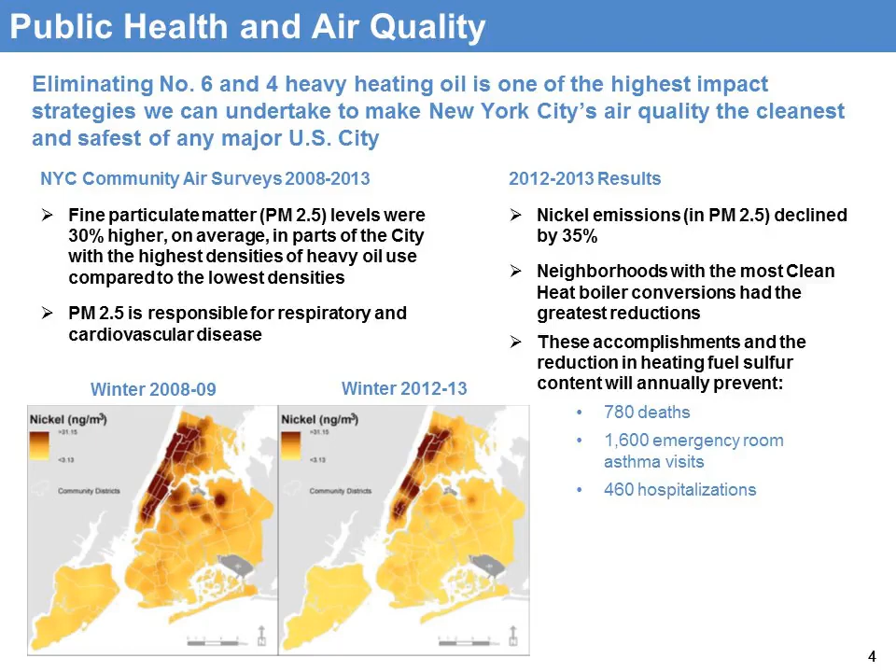In 2011, the DEP finalized regulations to eliminate heavy oil use in two phases. Phase one eliminates number 6 fuel: starting July 2012, the DEP would no longer issue certificates to operate boilers with number 6 oil. Since certificates run for 3 years, all certificates would expire by June 30th, 2015, meaning in just a few months no more number 6 oil would be allowed as a primary heating fuel.

Phase 2 requires all buildings to convert to the cleanest fuels by 2030, or when replacing a boiler or burner. So number 6 and number 4 heavy oils would be eliminated by 2030. However, for example, if a boiler system using number 4 oil needs a burner replacement later this year or next, a conversion to a cleaner fuel would be required then, since another certificate to operate with number 4 would not be issued.

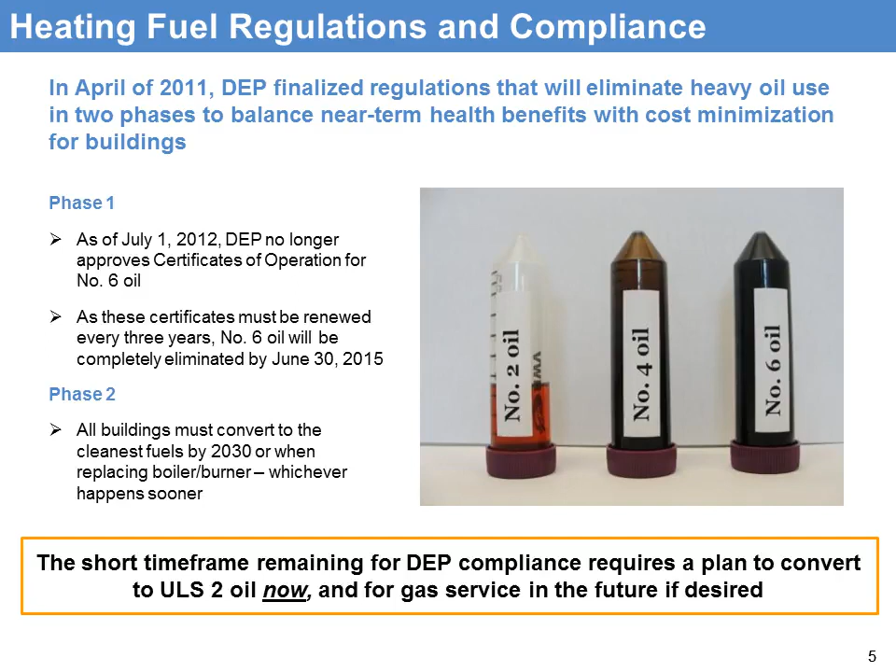All in all, this points to a short time frame remaining for getting into compliance. A plan to convert to ULS2 oil now to get onto a clean fuel is really required, and gas service, if desired, would be something to plan for in the future.

Clean Heat provides technical assistance, working with building owners and property managers to help manage the conversion process to clean fuels. We also have partners for financial assistance to help with the fuel switching process. Visit our website at nyc.gov/cleanheat for more information.

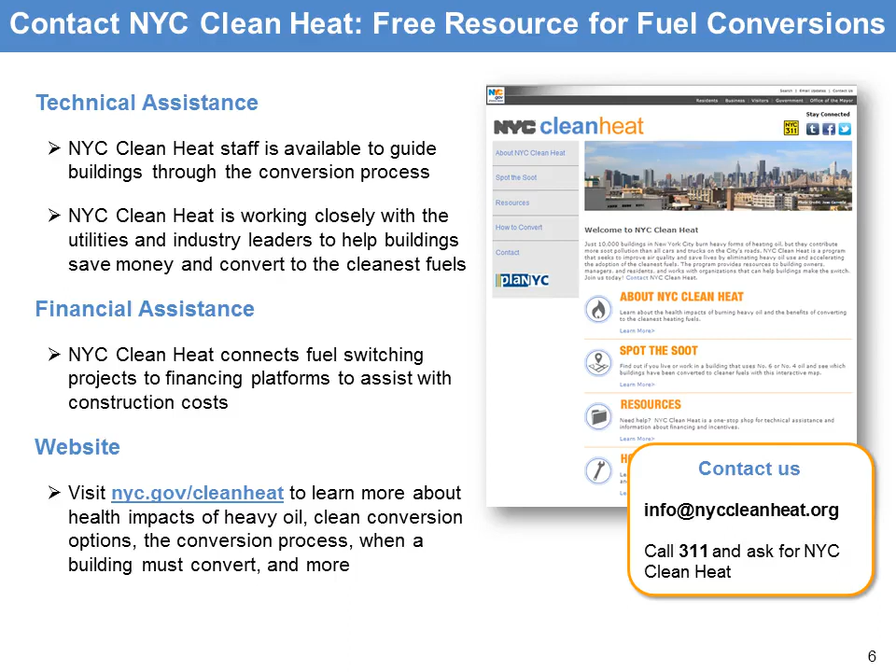We'll now go into the process—really the second of five steps to conversion. The previous webinar talked about assessing fuel choices, and we're now going to look at the process for obtaining contractor bids.

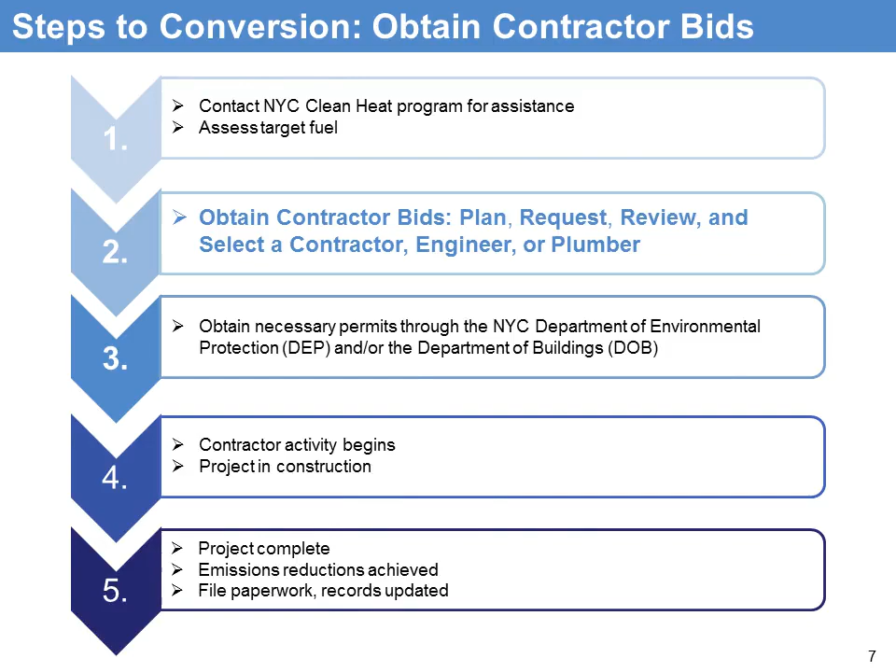The planning stages start by getting a status of the heating system and understanding what's required to move forward: Have the boiler or burner exceeded their useful life? What are the conditions of that equipment? And is the burner capable of burning oil and/or natural gas?

It's also important to assess the condition of the fuel oil storage tank and how it's situated, and for planning for gas in the future, whether the chimney is properly lined or what other repairs may be required.

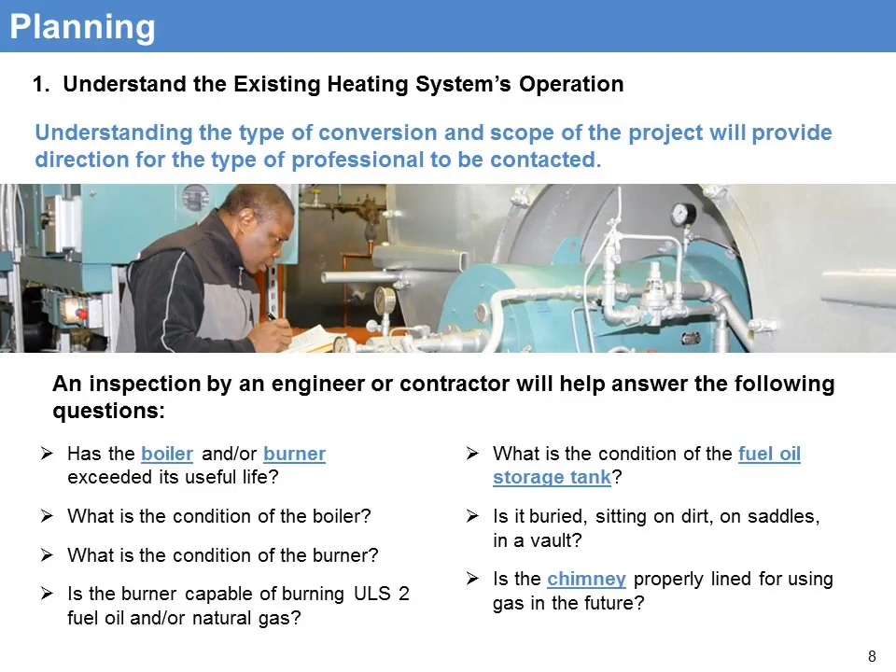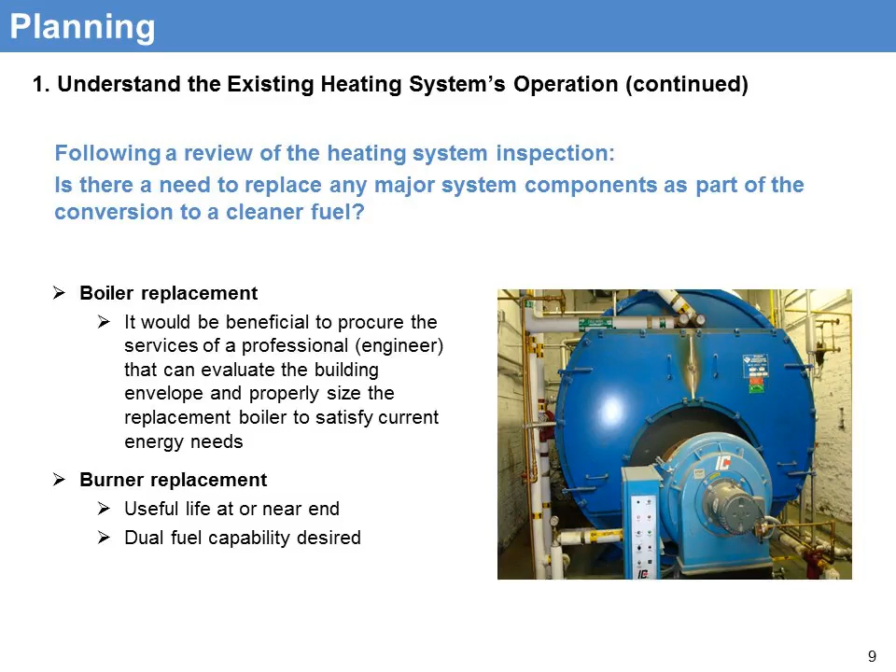In terms of potential replacement, if the boiler is to be replaced, we recommend the services of a professional engineer to evaluate the building envelope and properly size a replacement boiler that meets the property's energy needs. The burner would be replaced if it's at or near the end of its useful life, or if dual fuel capabilities are desired.

As for the fuel oil storage tank, keep in mind it must comply with regulations issued by the New York State Department of Environmental Conservation (DEC). Cleaning and relining the tank may not be cost effective, so it may make sense to replace it at that point.

If you don't have to replace the tank, it's important to bring it and the room up to compliance. Contractors can perform the required work and make sure it's situated properly on saddles, for example, or kept off grade to ensure containment.

We have specialists available who can do this type of work and potentially save money on the job. Once cleaned, the tank must be tested, and if the test fails, there needs to be a plan of remediation to be reported within 2 hours.

It's recommended that you proceed with caution if a contractor claims that tank testing wouldn't be required if you downgrade from number 6 to another heavy oil, like number 4.

Basically, porosity can develop, which could lead to a leak using less viscous fuels, or the small cracks that have been filled by the heavier oil, number 6, may allow for leakage of a thinner mix of fuel, of oil, and money that you'd invest in testing can be far less than the potential costs of cleanups and fines.

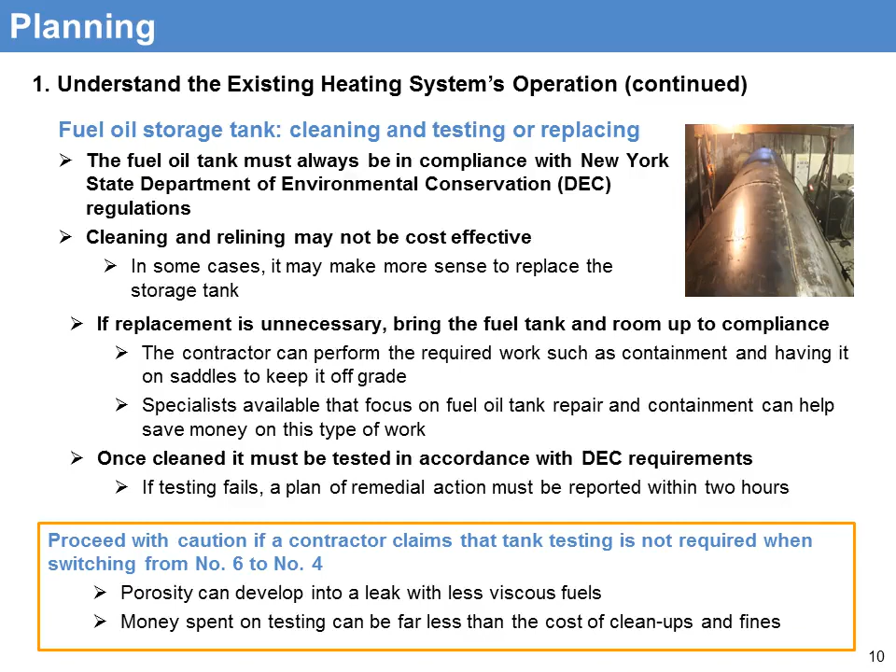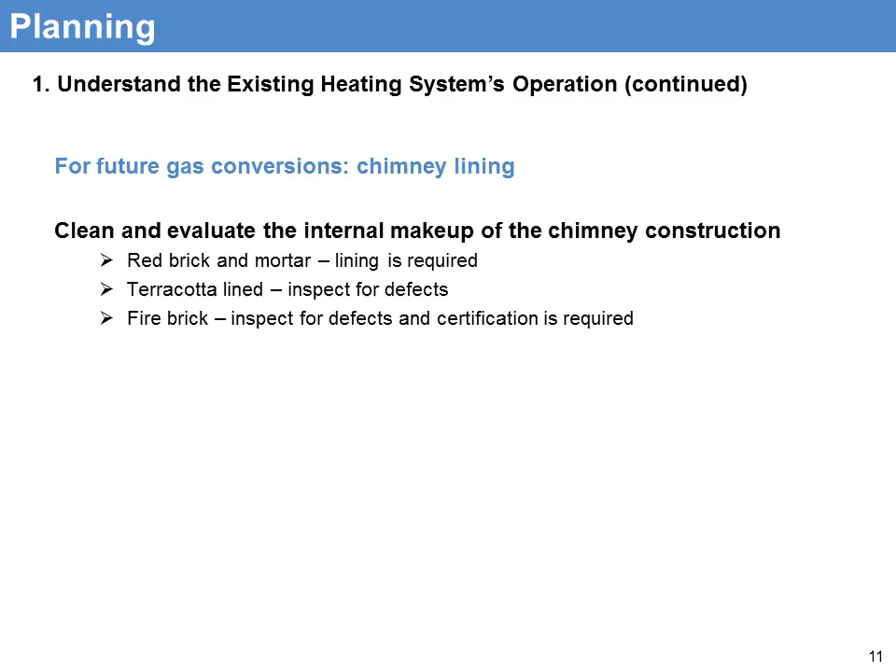For future gas conversions, an inspection of the chimney liner would be required, and either a new liner to be installed or repairs and treatment to bring the chimney liner up to code, with a certification required after defects are found and repairs are made.

So who to approach for obtaining bids? For the oil-to-oil conversions that are the priority at this point in the process to get into compliance, those conversions can be performed by licensed professionals with proper qualifications, fuel oil companies, plumbers, and boiler contractors among them.

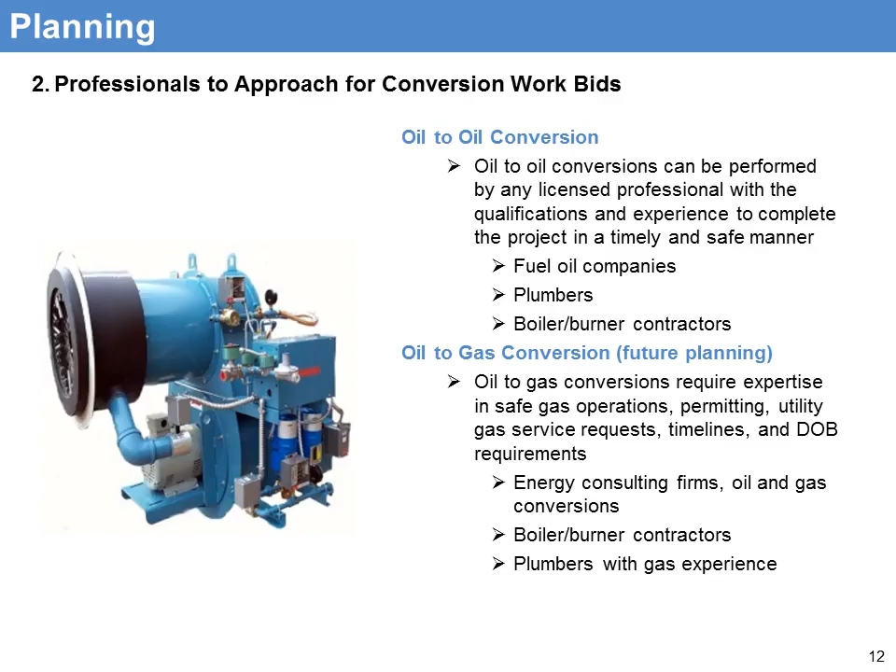If looking to also use natural gas in the future, then those conversions would require expertise in that area. Energy consulting firms that work with both oil and gas conversions are a possibility, as well as the other contractors and plumbers who have done that type of work before.

Something else to consider are the requirements for Local Law 84 and Local Law 87. If your building needs to file the Local Law 84 reports, and if Local Law 87 auditing and retro-commissioning is required, then you may want to look for professionals who also do that work and can make recommendations.

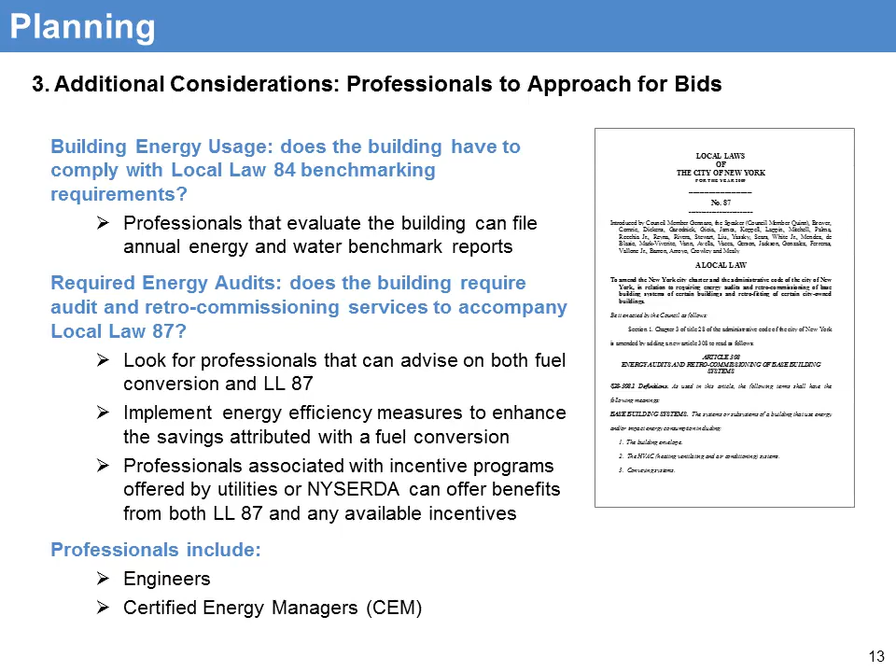They could also implement some of the energy efficiency measures that could be identified through the process, and those who are familiar with incentive programs through the utility or NYSERDA could offer those benefits as well. Engineers and certified energy managers would be among those who do this type of work.

As far as where to find qualified professionals, on the NYC Clean Heat website, you can identify boiler and burner installers that are recognized by the city, the Department of Buildings, to do the licensed work in New York. The ULS2 conversion specialists we have can assist with those types of conversions with ULS2 and biodiesel mix. There can be incentives to convert, and free assessments of the boiler system are included by many.

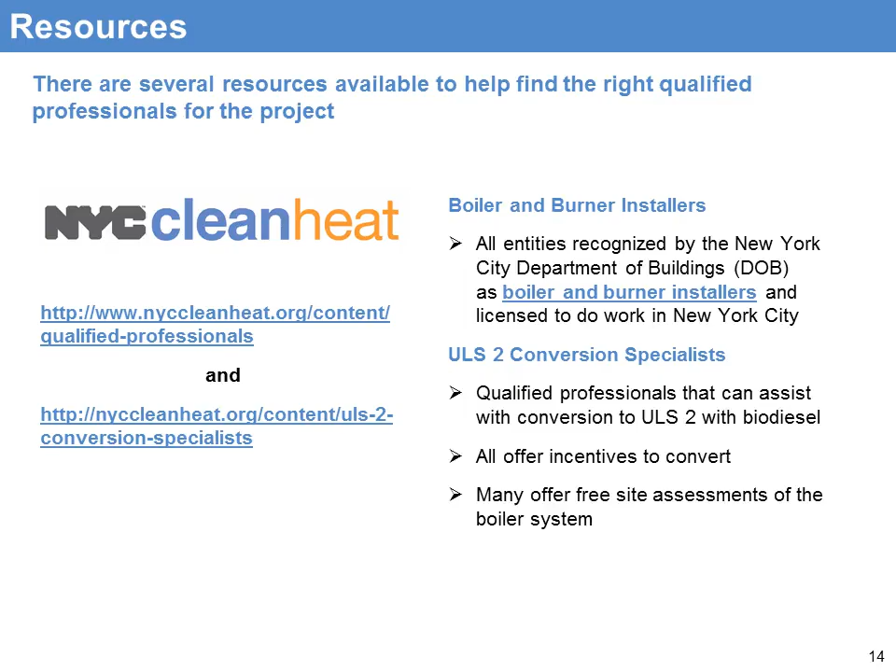Several resources through the NYSERDA site as well. Commercial buildings as well as multifamily building categories are provided, both spots on the website to direct you accordingly. So with that planning in mind and resources identified, bids can be requested. To obtain bids from a minimum of 3 firms is considered to be best industry practice.

You can invite multiple firms to a site visit to look at the building and the boiler room, to help ensure the quality of the bids that you'll receive. You can conduct one site visit for all firms at one time, ideally, so you could just do the one visit with everyone and save some time.

And questions and responses should be noted to help in the bid process and know what to expect in a proposal submitted. The scope of work is the main component of a proposal, in addition to pricing, terms and conditions, and a timeline. The timeline should have both projected start and completion dates.

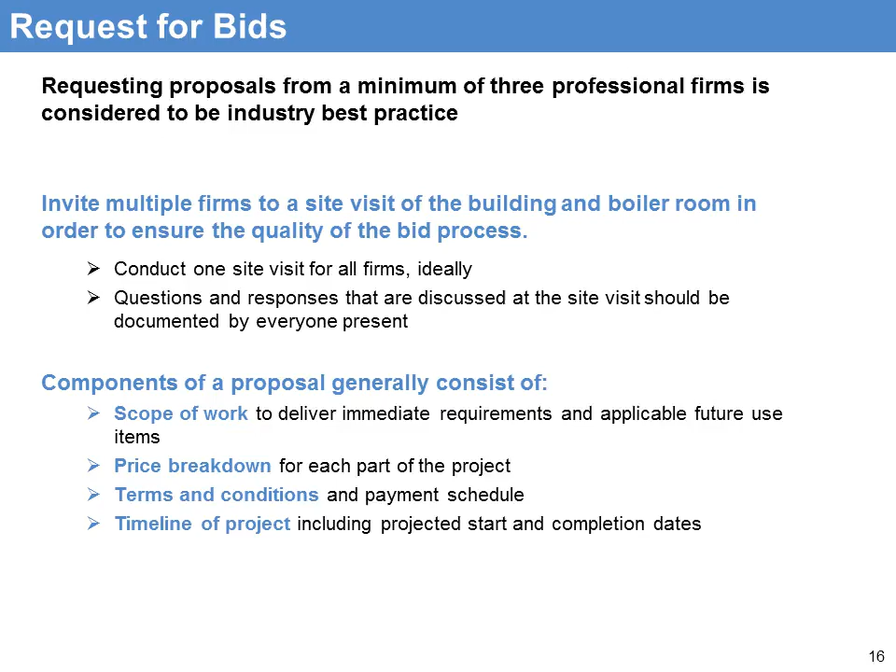So going into the scope of work in a little bit more detail, the premise is to have all the proposals have the same scope of work, and this way you can do a fair apples-to-apples comparison. As you review scopes of work, it's important to look for discrepancies between proposals. If necessary, follow up with questions to understand why some firms may have included or not included an item that you thought would be part of the proposal, and you may even reissue the bid or ask for revised scope of work and pricing to make sure that they're consistent.

In terms of some of the things to expect, conversions off number 6 would involve removing a sidearm heater. This is no longer required to keep the temperature of the fuel at the required level after switching off number 6. If you switch to ULS2 or in the future natural gas, you'll also remove the electrical preheater. And again, energy savings are associated with the removal of this preheater. So if you're moving to number 2, say, then that's another savings versus number 4 fuel.

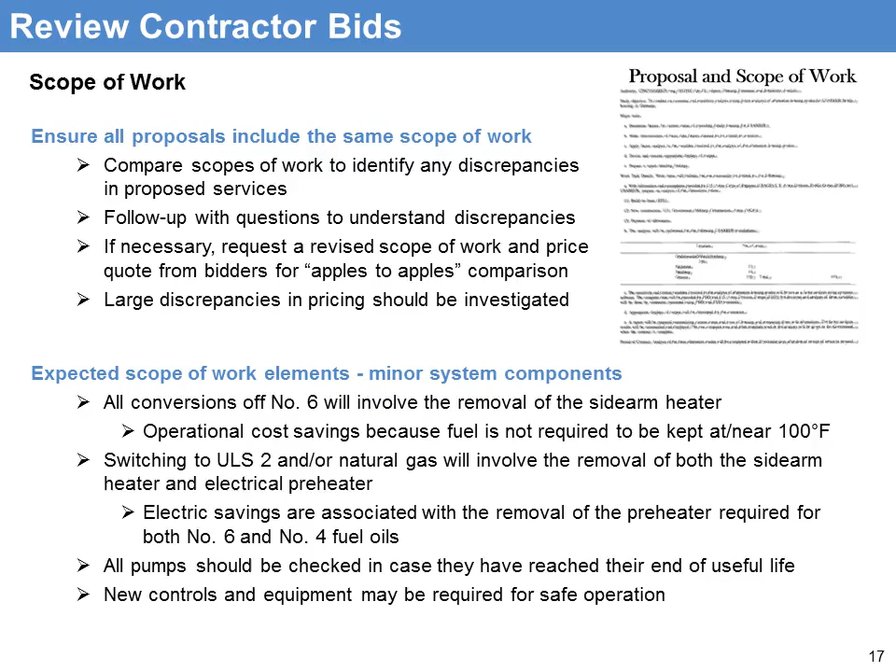All pumps should be checked, and any new controls or equipment that's been identified as required should be listed as well. So finally, you're ready to do your selection, and after reviewing scope of work and pricing for the conversions, you'll see what's been specified in terms of equipment replacement or repair. Obviously, the specified heating oil, and any items that help plan for a gas connection in the future if desired.

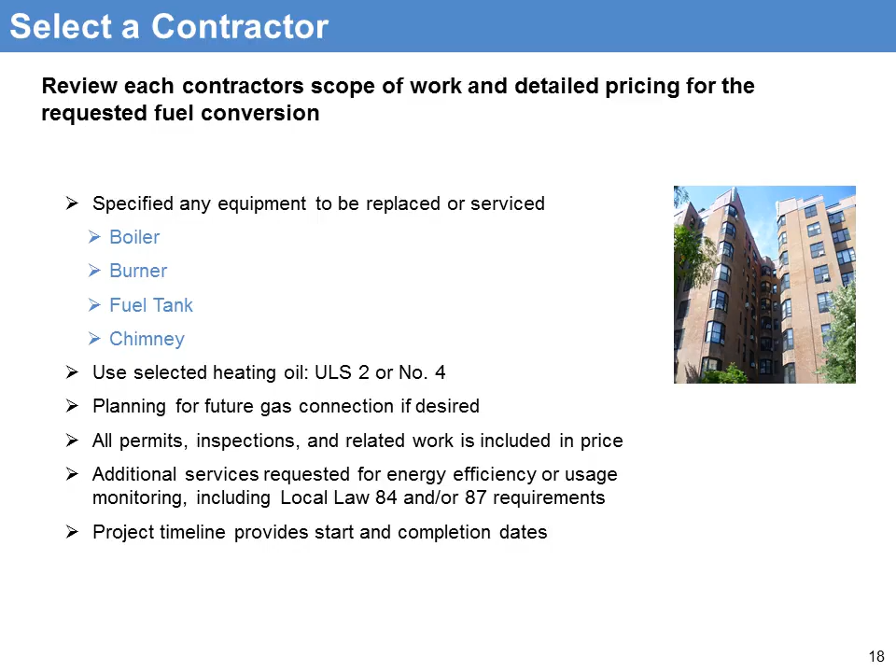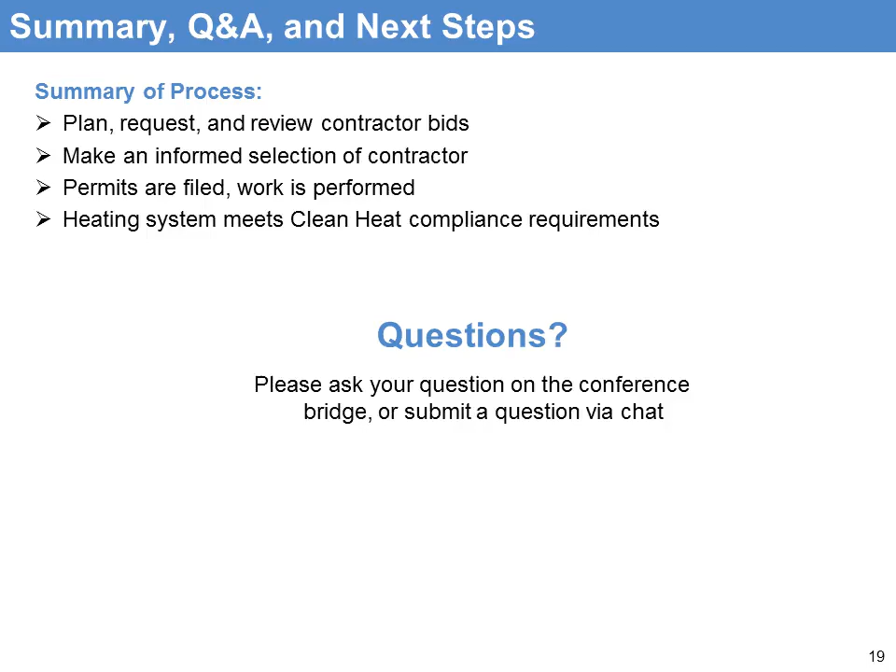All permits and inspections and related work should be included in the price. And additional services for Local Law 84 or 87 requirements to be met should also be in the proposal. So in summary, by planning, you can make the requests, review the contractor bids, and make an informed decision. And following that, permits can be filed, work can be performed, and the heating system would be brought into clean heat compliance.